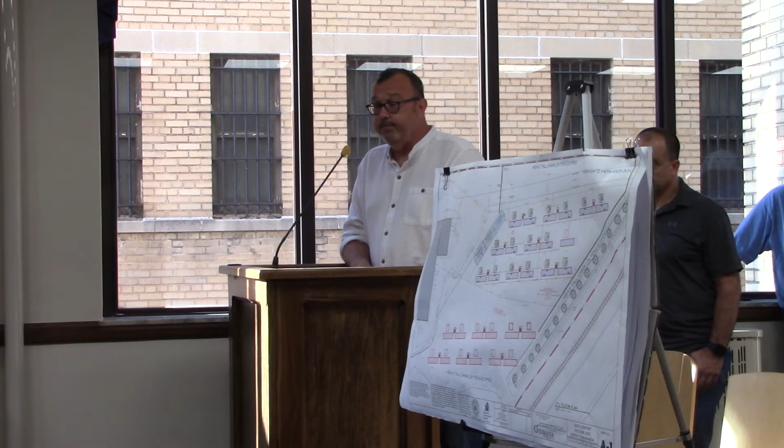Because there are other issues about creating uniformity, all the shipping containers will be painted to match. And other issues were just about the structures themselves.

Between each pair of shipping containers would be a series of platforms and an access set of stairs allowing technicians access to the multiple levels, to go in, service the equipment, and leave. There would be no occupation for any period of time other than to service the equipment. The switchgear building would have a bit more occupancy, but still very limited, just assuring the equipment's working properly, and servicing it if necessary.

Any other questions about that? We could probably have any of the Fortistar people talk about the actual practical applications.

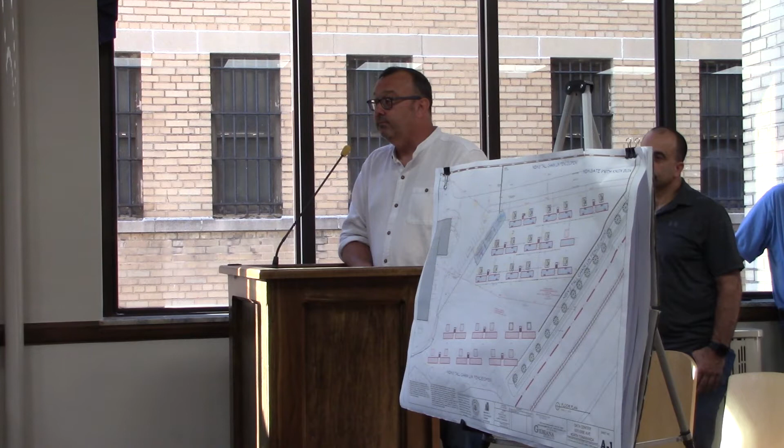Well, I have a question, since we're dealing with the units themselves. Now, you're saying shipping containers. I think most people have a negative view of the looks of shipping containers as rusted out, sitting in a dock somewhere. Can you assure us that, I know you said they're going to be painted, but they're housing a great deal of expensive equipment, so those will be maintained and not just let go as our perceptions of those are?

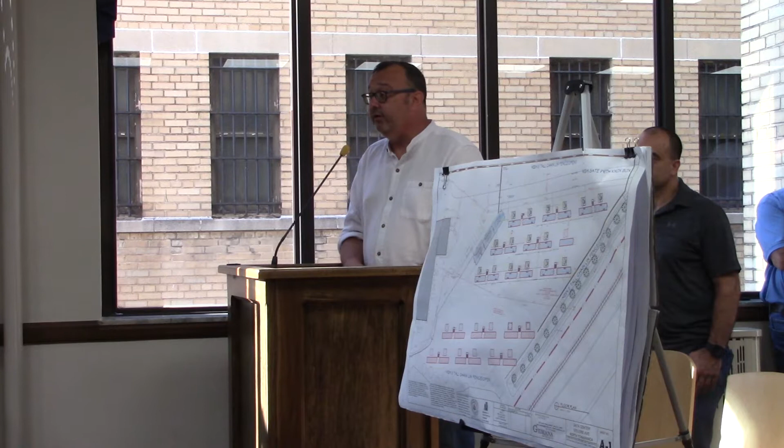Almost self-evident that you're exactly right. The cost of the equipment housed in there would almost require the ongoing maintenance of these buildings. So certainly they're all going to be very weatherproof and secure. The paint color hasn't been decided, but the idea is it'll match the existing building, so it's going to match the uniform building. So they're not going to say Maersk and Sealand and Hapag-Lloyd and stuff like that on them? No, you won't see that.

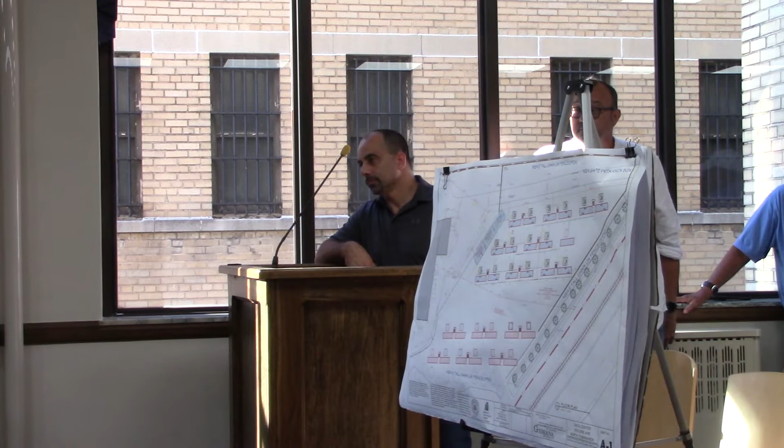Dan, if you could answer a question for us. I believe at the last meeting you said Fortistar would be involved, and now we're under the impression that Fortistar will be selling the property and a new company will be running everything. Am I correct in that?

Actually, that's a question for the higher up guy. We're hearing two different things. My name is Tom Gesicki, and actually I said that last meeting, so I'm going to own that statement relative to that piece.

The intention is to sell it to DigiHost. DigiHost is not in the power industry, and we use a system of contractors and have since the beginning of time to operate that facility. We have a contractual relationship with DigiHost. If the sale is completed, we would still continue to manage it for them, and they will manage the new facility on the land they'll own along with the power plant under a contractual relationship. We've also had discussions about whether we will continue to own it, and they would just lease the property from us.

So all those issues are still ongoing, but we've agreed to work jointly to develop this project, and we're confident that either we'll own the power plant and they'll own this new facility, or they'll own everything. But in any case, we will be involved, absolutely, and myself, contractually, we will continue.

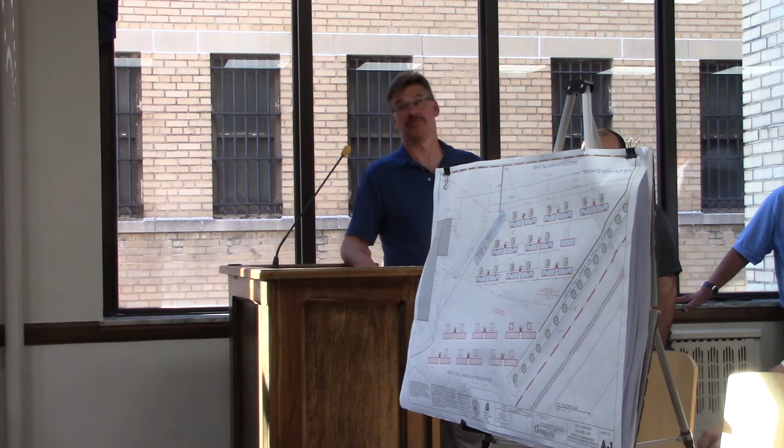Okay, so if you go through both phases, there would be a combination of possibly 15 container setups, based on what's there and my math. Yes, okay. I'm just trying to get a feel for the layouts.

Mr. Lecterman? So these drawings here don't give me a good perspective of how it's gonna look from Erie Avenue. Is it possible to submit architectural renderings so we can see what it'll look like? I think we have one.

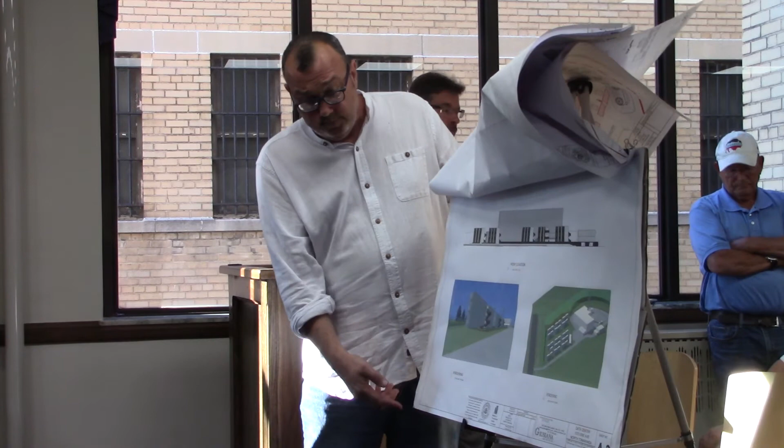You should have them in your packet. We did. There is something we need in our packet - this is essentially part of the view from what will be the new gate. And this is kind of an aerial view showing the various structures as well as the existing power plant.

This is a flat-on normal architectural elevation from Erie Avenue, with the berm removed, though. There's a berm at the road, and part of this would actually be truncated by the berm.

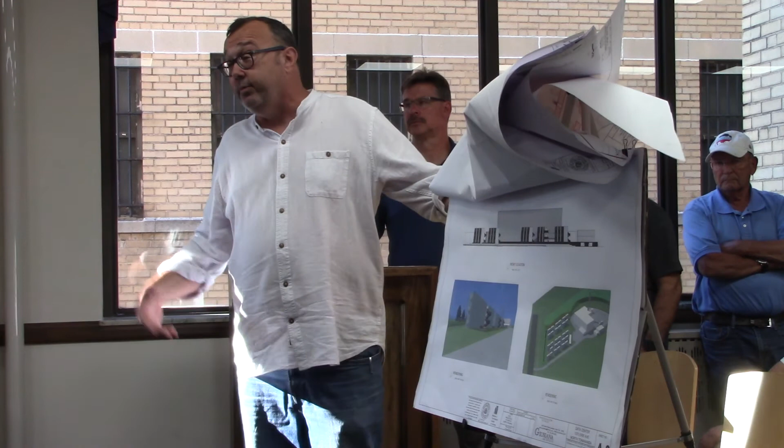And actually, because of the mature nature of the landscape on the berm, a lot of this won't be seen. We do have it. Any other questions?

We'll have a time to review it in detail at the next meeting. Go ahead, Carl.

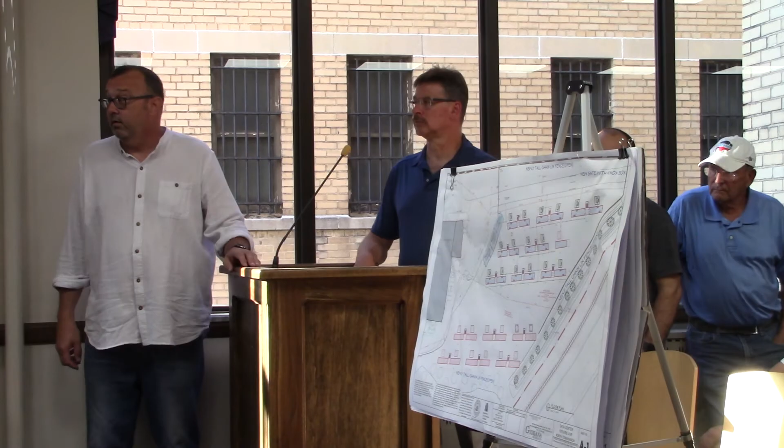So, Luke, it is confirmed that this is appropriate for the zone that this project is in? Yes, currently it is.

Okay, and then also, have you met with the fire department? We have not met with them yet. That would be something to do next. They have reviewed the capacity with the water, which they said is more than enough. Mike's got an email from the chief - it's more than enough, but some of it was based on lithium batteries, which you're not gonna have there anyway. But they say there's a 10-inch line there that's more than enough to fight any fire there.

In addition, I actually just this morning spoke to the city engineer relative to grading and drainage, and both are confident that we'll be able to provide all the necessary drainage within the existing structures, so there won't be any additions of retention or detention ponds.

She confirmed you would be under 1 acre, so we would not need a SWPP plan. When the SEQR was filled out, I think the assumption was grading the overall perimeter line, which is why the SEQR form said over 2 acres. But when you take each individual pad site, the disturbed area will be less than 1 acre, so stormwater pollution prevention plans would not be required. That was one of our key questions on the SEQR, so you've got to get in there and take care of it.

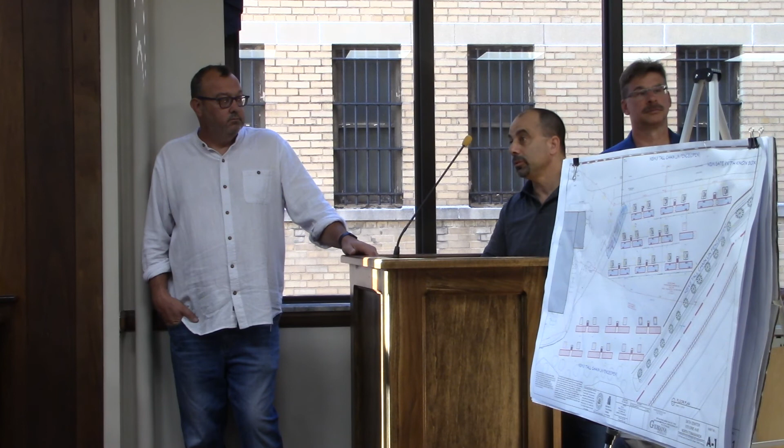That's not really up to us. I mean, that's for you to meet with the building inspector, and if there's any kind of legal questions, Luke. The permit was issued for the electrical, the first part of the electrical work, right? It was not for the pipe, it wasn't approved. But was that on the basis that it wasn't allowed in that zone?

No, there's no site plan approval. How do we issue an electrical permit for a site that hasn't been approved yet? Well, isn't it two different phases? It's running the pipe basically and then running the electric, so why can't they run the pipe? I don't get it. If we issue any permit for this particular site in any shape, way, or form, it has been my understanding, because I got caught doing this before, it would deem an approval by our department.

Can you two work that out, tomorrow or whatever, to give them an answer? Talk to Luke and the building inspector, stay in touch with them, and they'll give you an answer. We can't approve that, we can't give you that approval, but they can or can't, whatever.

To do what? Declare ourselves lead agency since this hasn't gone out, and it isn't going out. Yeah, we can declare ourselves lead agency, we might as well do that tonight, that won't affect it either way. So I will entertain, let's see if there's any more questions before we move ahead with that.

I know we talked about it a little bit upstairs, about the computers and the disposal. Really not our burden. I know, I'm just curious as to what the plan would be. Well, we have a hazardous waste plan at our facility for batteries, light bulbs, things like that, and that would end up falling into that plan if we have to haul them out. Does that involve the city?

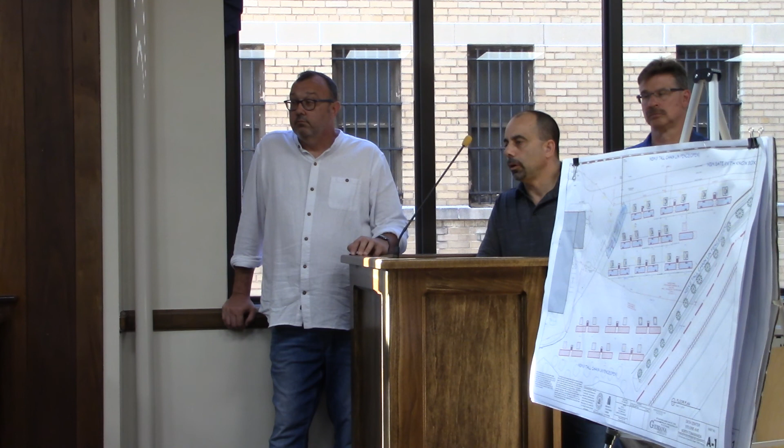The city? No, we have a separate private service for that. Okay, okay. So you guys take care of it.